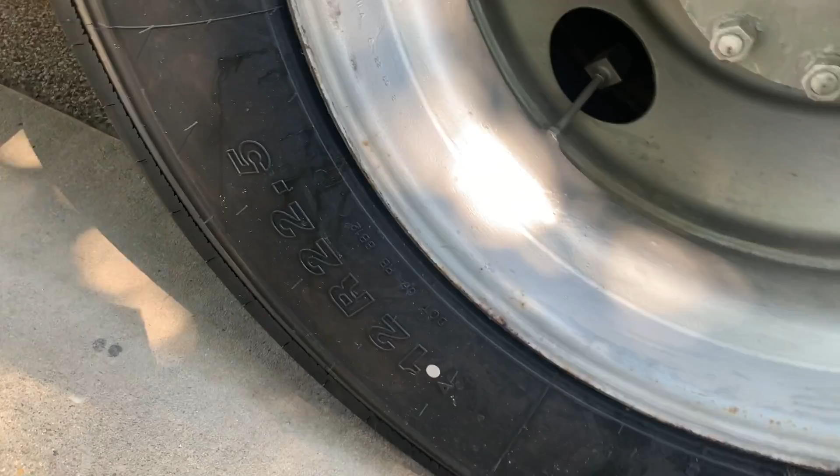A couple people asked about tire pressures. I made mention that that's why we went and got the bus weighed, so I know what my rear axle is. I've got 16,780 pounds on the rear, and I can divide that by 4 tires.

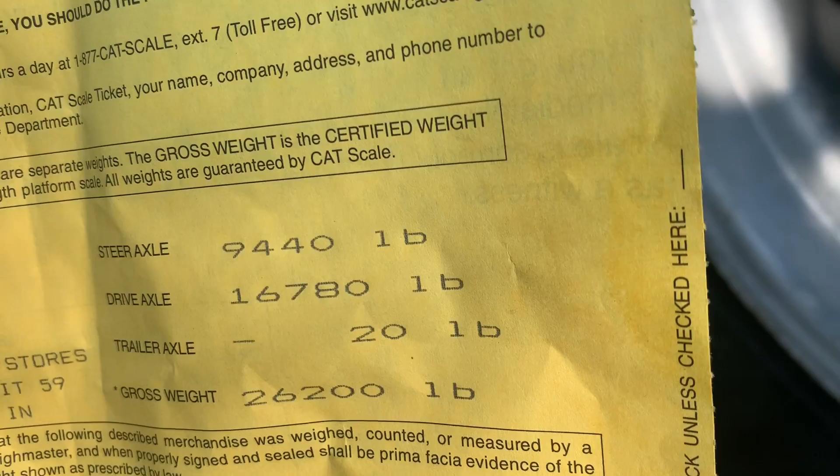Then I contacted the tire manufacturer, and they'll have a chart. Most of them, the chart's online. I couldn't find it for this brand, so I had to call them, and they gave me the information over the phone. Basically, they rate the tires at different weights, and for duals or for singles it's different, and the amount of tire pressure you should have for the amount of weight it carries.

Their chart, the smallest it goes down to is 4,700 pounds, and at 4,700 pounds per tire, so I'm under that. I'm only like 4,000, just barely 4,000. So I'm in no concern of going over that. I'm not going to add that much weight to the rear.

Just to give you an idea, that recommended tire pressure is 80 psi. The tire itself, the recommended psi is 135, what's stamped on the side. That's the max load on them, which is 7,160 pounds per tire for a dual, so that'd be 28,000 pounds - more than my entire bus weighs just on the rear axle. So I'm well under that. 80 psi is the recommended tire pressure for that. That's a good number to use.

Why do you use that? You'll get better fuel economy, a little better ride. I don't need to be driving on rock hard tires like that if they're not carrying the weight. But you can't just guess at what that is, you need to go by their chart. They've tested it, they know what it can handle, the sidewalls and all that.

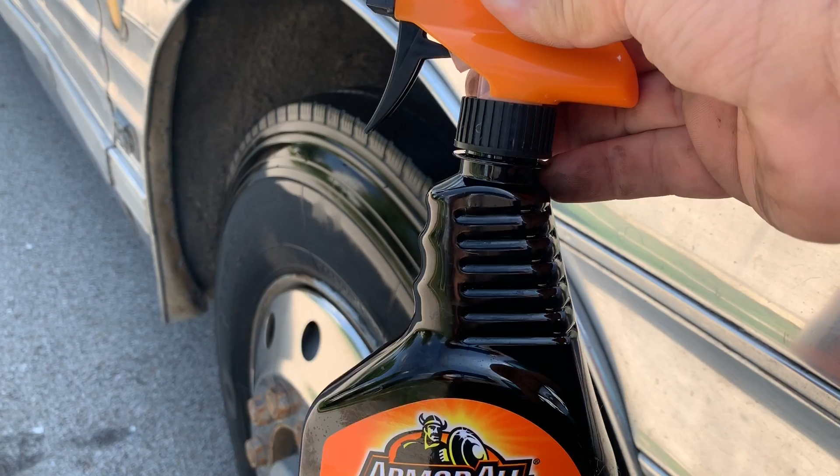That's the tire shine I used. I'll throw an Amazon link to it. The tire is as shiny as the bottle is - I put it on about 4 hours ago, just walked out here and that's what it looked like. I'm surprised.

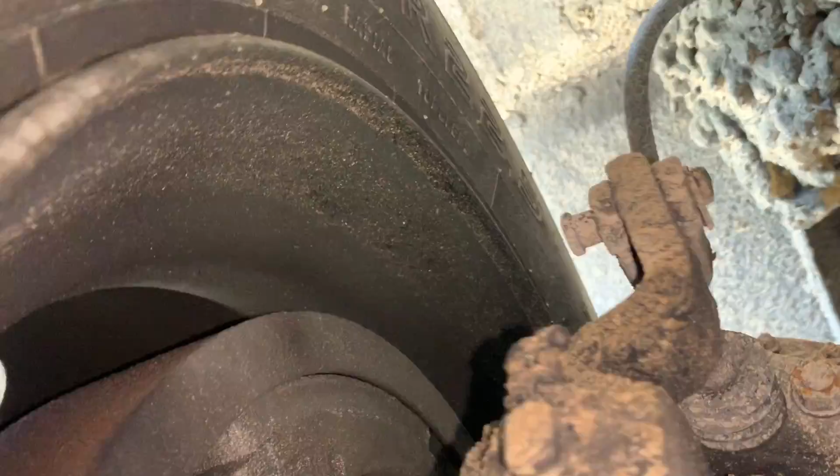So a silver side slack adjuster is a little different. Most slack adjusters have a little collar you have to push down on. The silver sides is just that you use a wrench and not a ratchet. You can see I got plenty of meat on the brake shoes there.

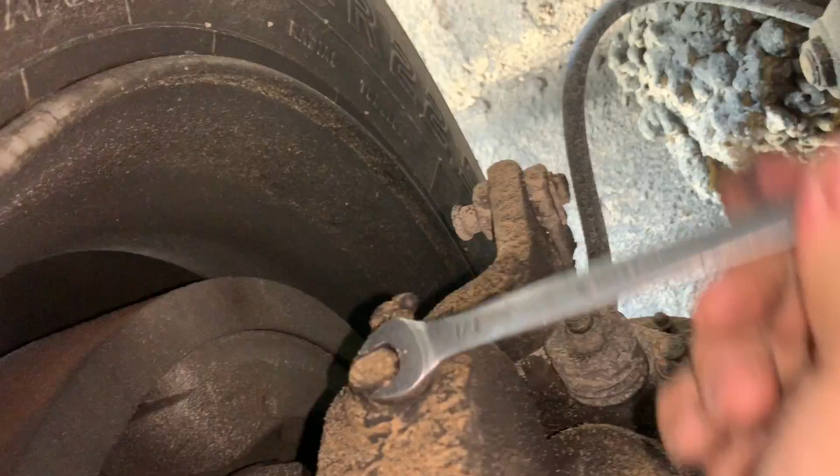So you turn it as far as it'll go tight. I got about a half a turn on it, and then if you just back it off a quarter turn, it's adjusted.

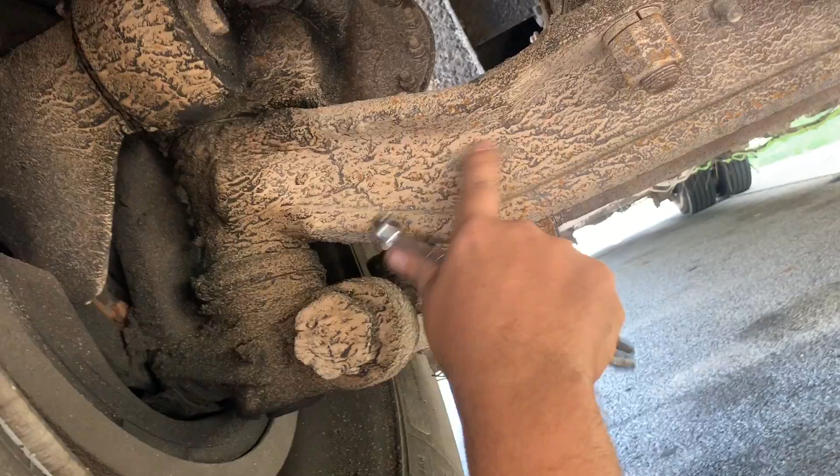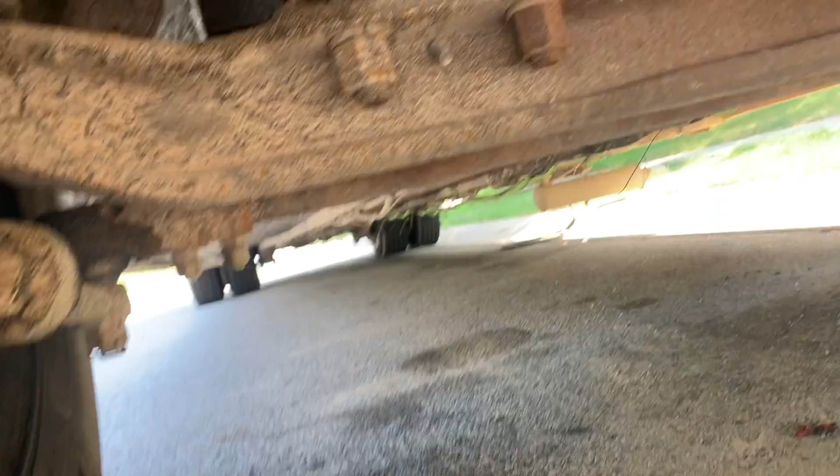I'm going to get under here with my hose in a minute, and this is all that sandy stuff from Michigan still on here. I'm going to try and clean this up just to get that crap off there, because it's definitely salty - you see that rusty color coming through. And then I'll grease everything up. I'll show you the grease chart on this. If you don't have a bus, you'll be like, oh my God, that's crazy. There is a lot of grease fittings on this bus.

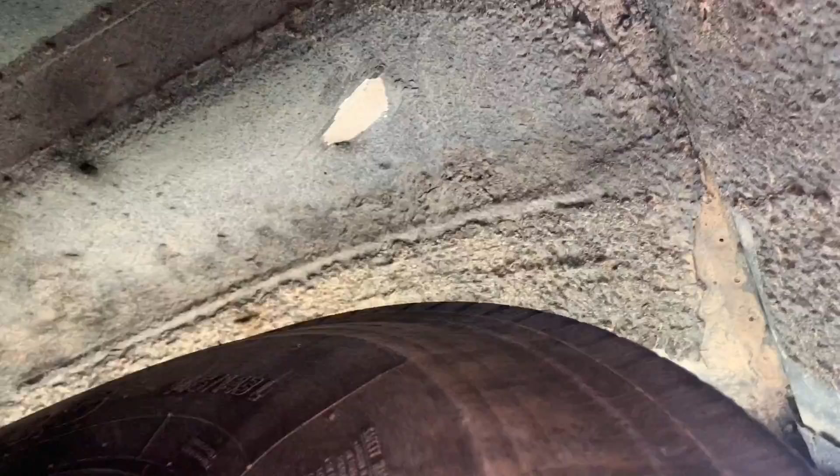Oh, that's all right tight. I'm gonna go one more click because 2 clicks wasn't quite a quarter.

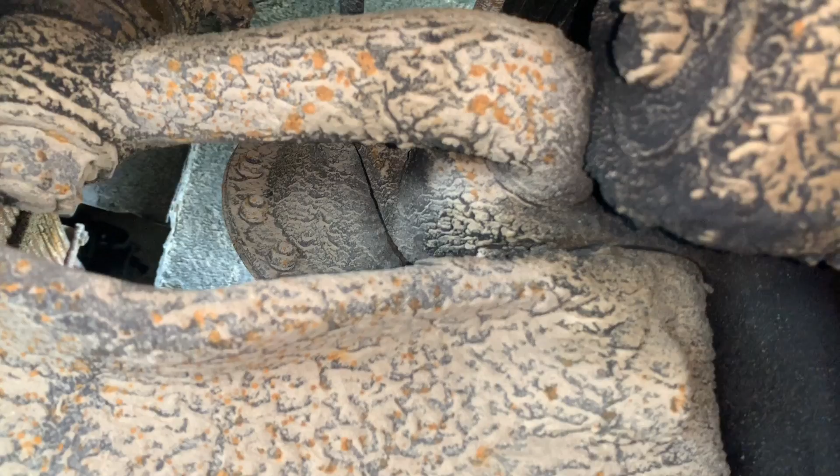Plenty of meat on the shoe. Same thing, I'm gonna get all that sand, try and get that all off there. I don't want that getting into the grease or anything, and then the new grease should clean it out a little bit.

This is my air horn, and it's probably 2 feet long. It's huge.

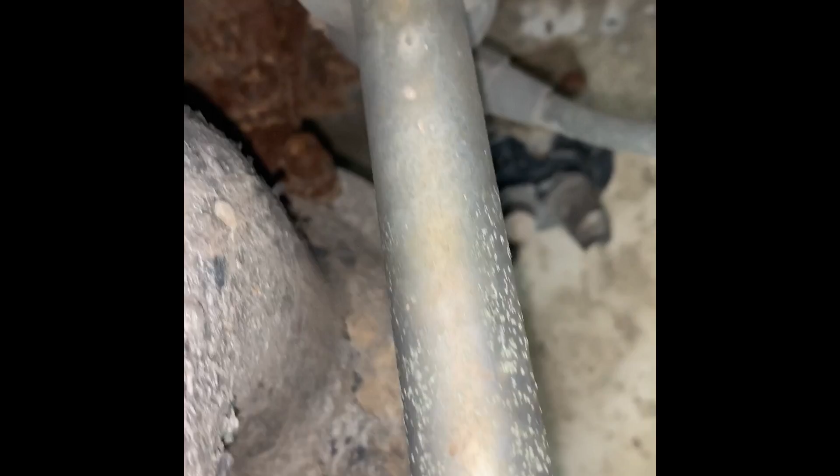One of the things for the pre-trip for me is checking for leaks, and I see a little puddle under the engine there where it looks wet, and it looks like the drain plug's wet on the bottom, so go check that out real good.

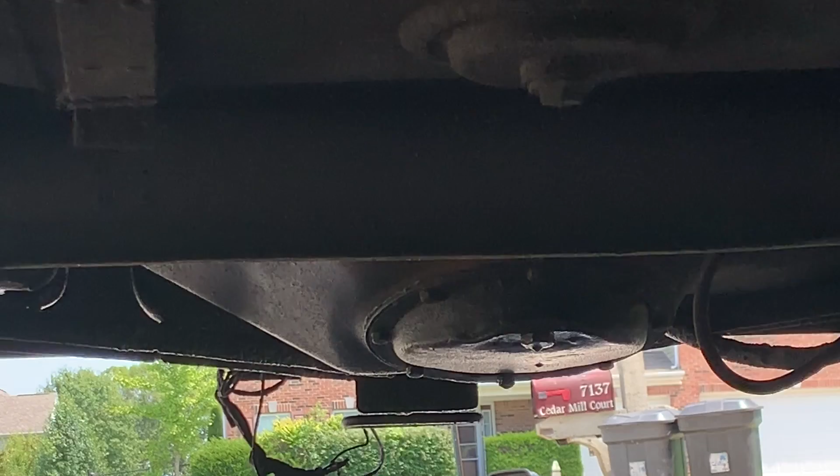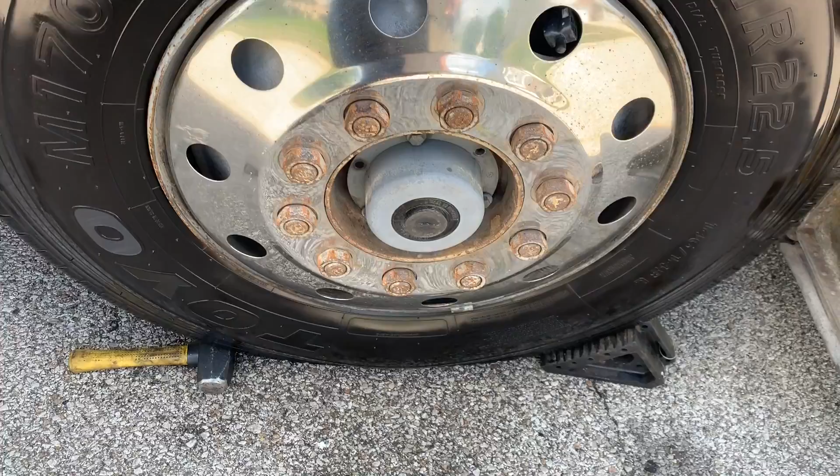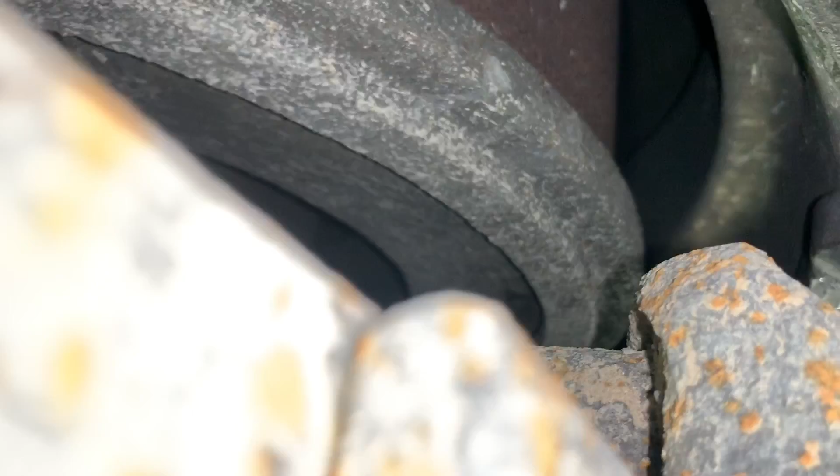Got the wheel chocked because I had to release the parking brake in the back in order to do the rears, since you can't have the brake engaged to set the brake chambers. So there's the slack adjuster, and there's the brake shoes - more than half an inch, maybe not quite 3/4 of an inch of shoe left on there.

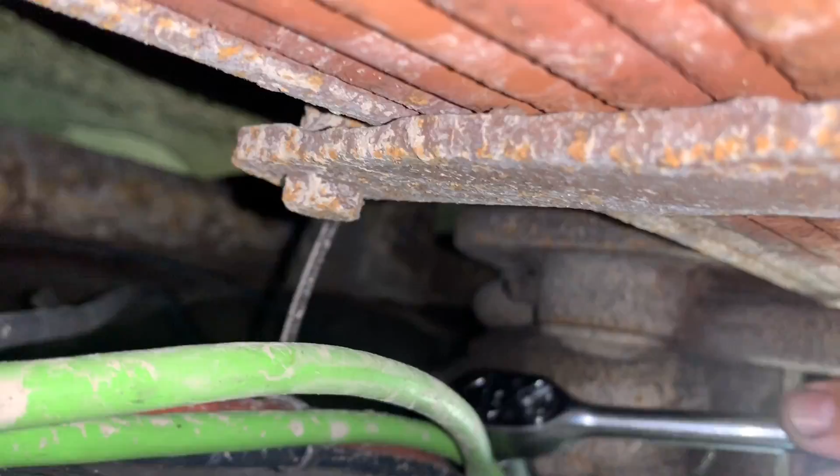This is hard to get to. I may not get a video of this one.

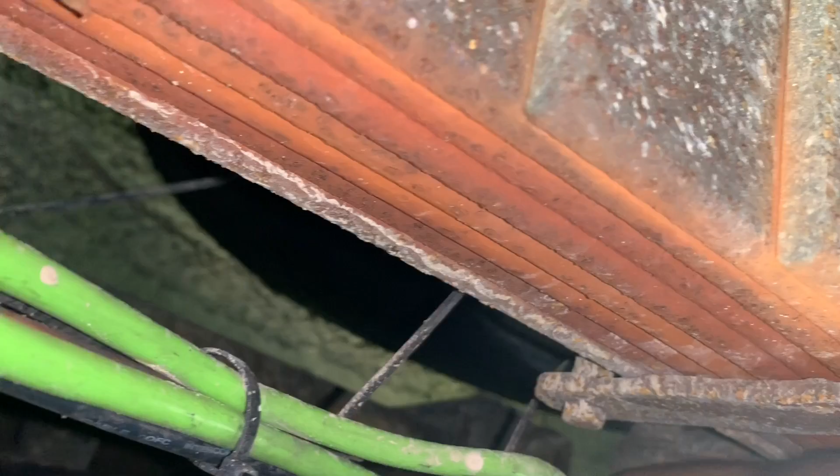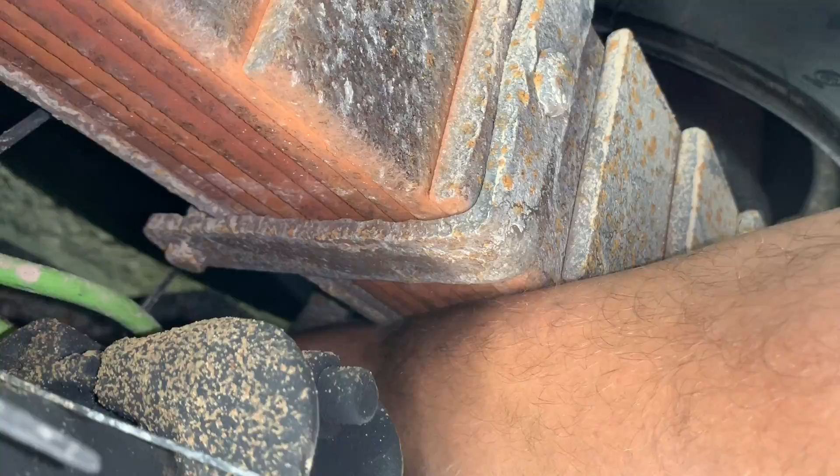Gotta set the phone down. So the oil pan's real dry all around it everywhere, just a little shiny right there. But I think that's leaking there, and or the drain plug over there and it's blowing back - that's probably my guess. So I got my 15/16 here. But it definitely put a little spot there, a little bigger than a Coke can.

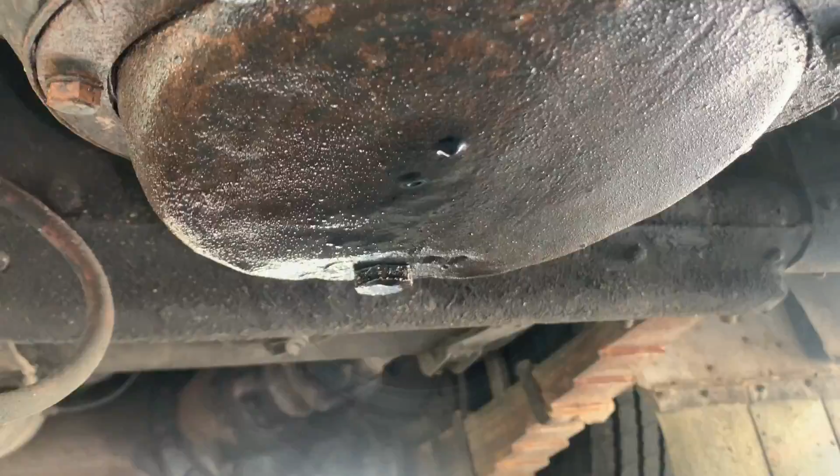My bus actually is not running right now, it's turned off, and I got about 62 pounds of air in there. I always want to check my brakes, so when I step on the pedal, I'll lose air pressure as it fills the brake chambers, but then it should instantly stop losing air and hold that air without losing any.

So I'll step on the brake pedal and hold it down. And you can't lose more than - I don't remember what DOT is, I want to say 2 psi a minute. You can see I'm not losing any air at all.

That's just a safety check to make sure that the diaphragm's not leaking or a brake hose or something like that.

Overall, I don't lose any air on this bus. I started this bus up earlier, put 80 psi in it, and that was just enough to release the parking brake and then reset the parking brake. That was probably 3 hours ago, and it's still holding that same air pressure. So this does real well with that.

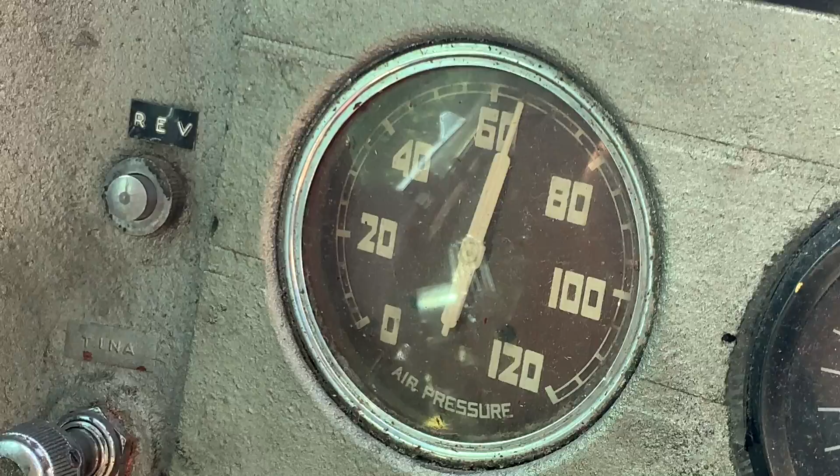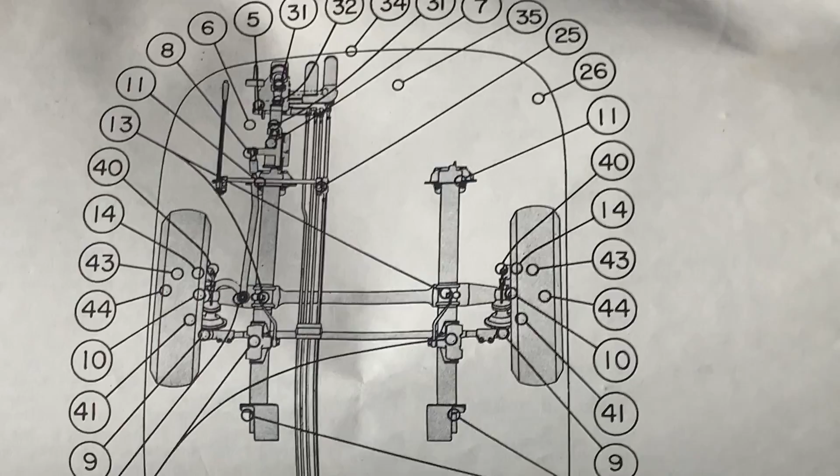Okay, here is my lubrication chart. Most of these are grease fittings - I told you there's a lot of them. Every one of those numbers.

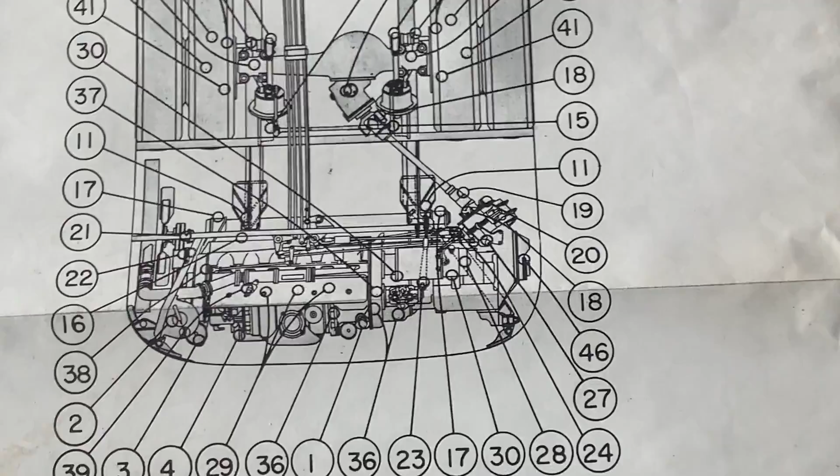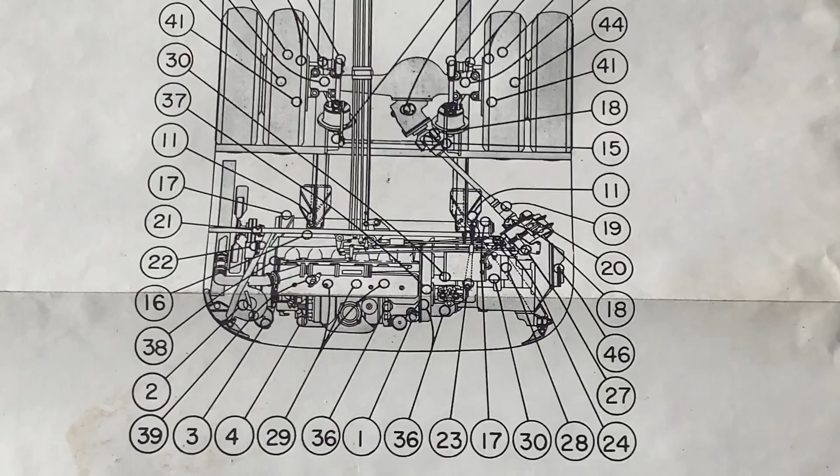A couple things aren't, like battery terminals there are not. Differential, that's oil. Transmission, engine oil, engine filter, that kind of stuff are on there. Engine strainer, which I don't have anymore - I just have a spin-on oil filter, which is better. But if you had a sock filter on there, those always have the strainer can, which is a separate one. So all this stuff is clearly listed here on a chart.

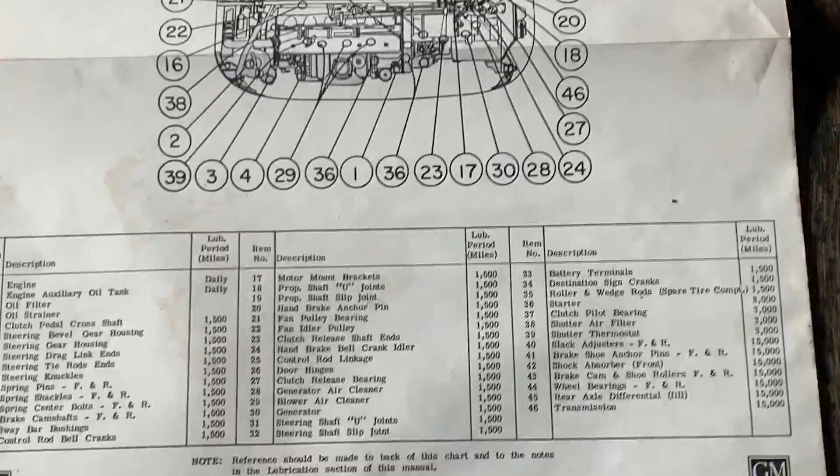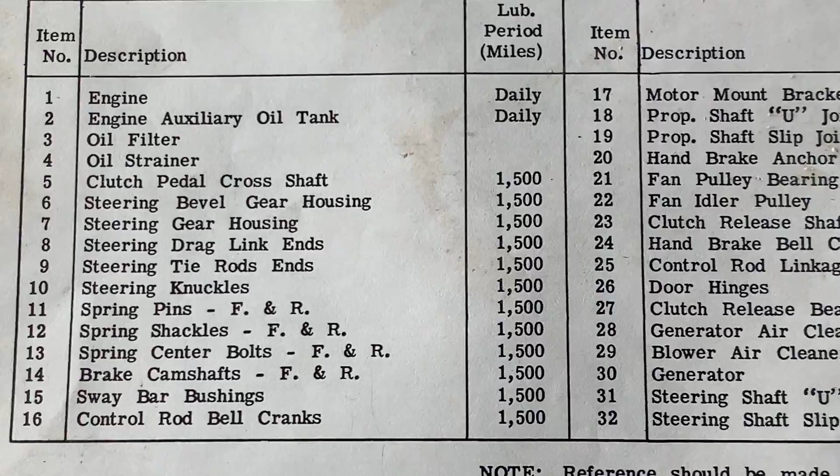But again, if you look at all those, every single one of those numbers, 90% of them are grease fittings. So there's things on there like the bell cranks that go for the linkages and the steering, the clutch and the throttle and everything like that. And then the lubrication period - this will really freak people out - it's 1,500 miles for most of that stuff. And then the numbers correspond with the code on there.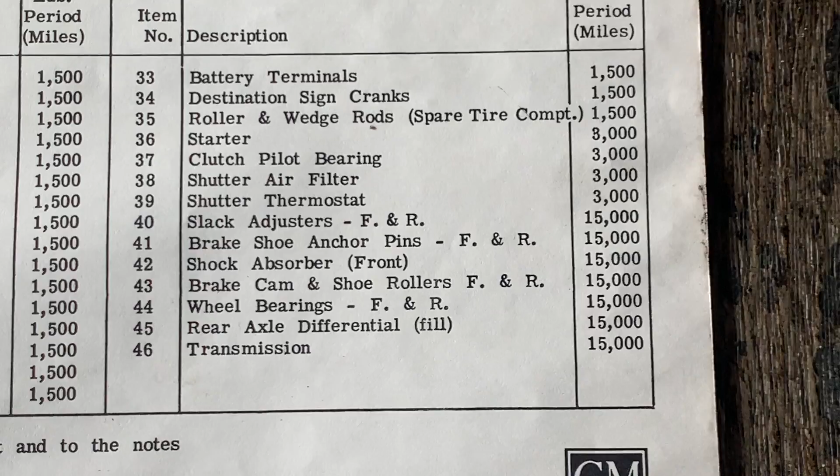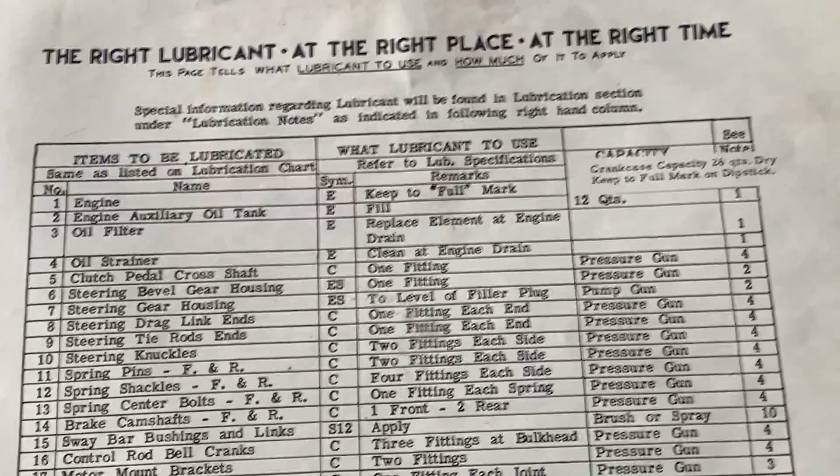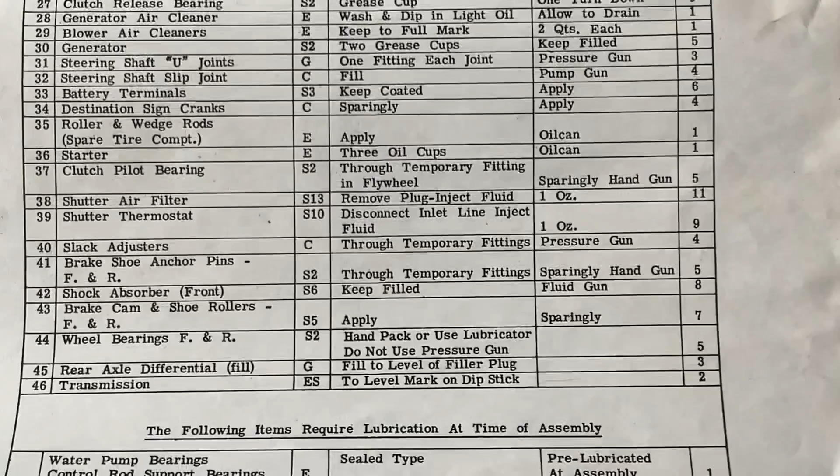So the back of this tells you what to use. For the most part, everything here I'm just using a multi-purpose grease for. But all of these codes stand for a different oil. It could be like sodium soap grease, chassis lubricant, gear oil, that kind of stuff. Here's the chart.

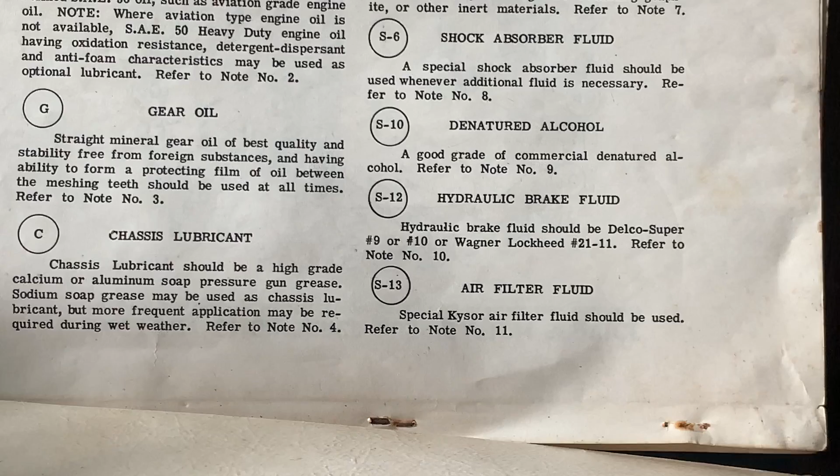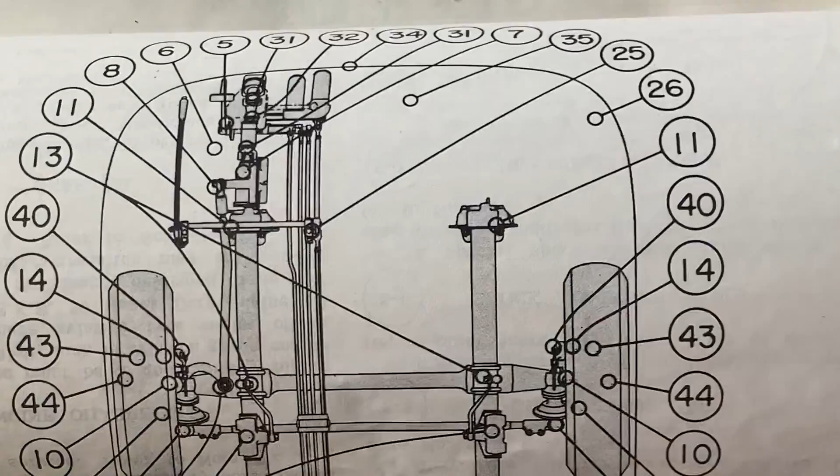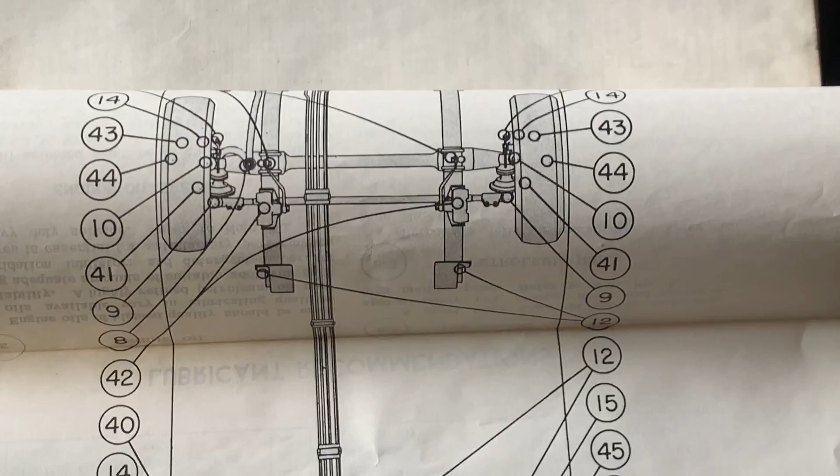So there's a lot of stuff to do on maintenance on a bus. I would assume this chart comes as a surprise for some of you guys. If you don't own a bus, you'd have never realized there's so many grease fittings on here. Some of them are for the steps up front, and all the normal tie rods, kingpins, slack adjusters. The leaf springs get greased everywhere, and they actually get greased where they cross the axle too. There's a fitting on there too, and then up at the shackles.

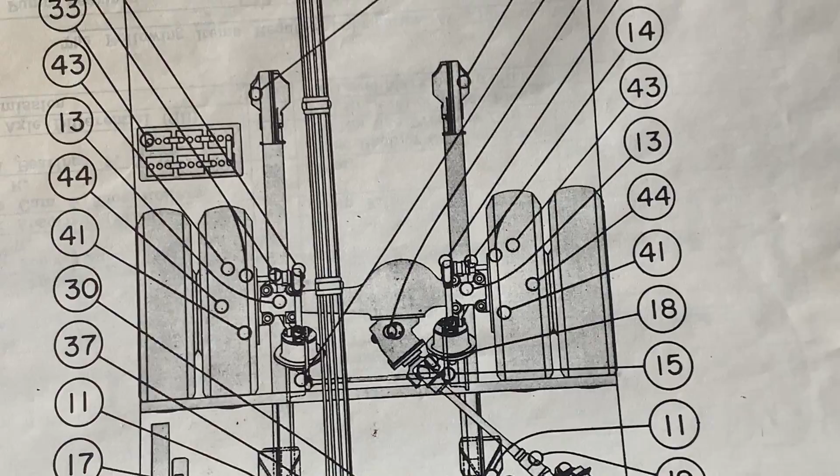It's a whole lot of work to do, and it usually takes me about an hour and a half or so to go through the whole list on them.

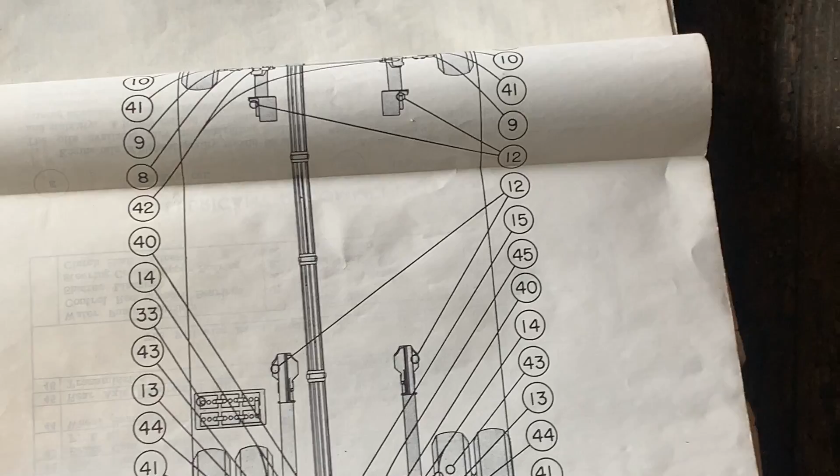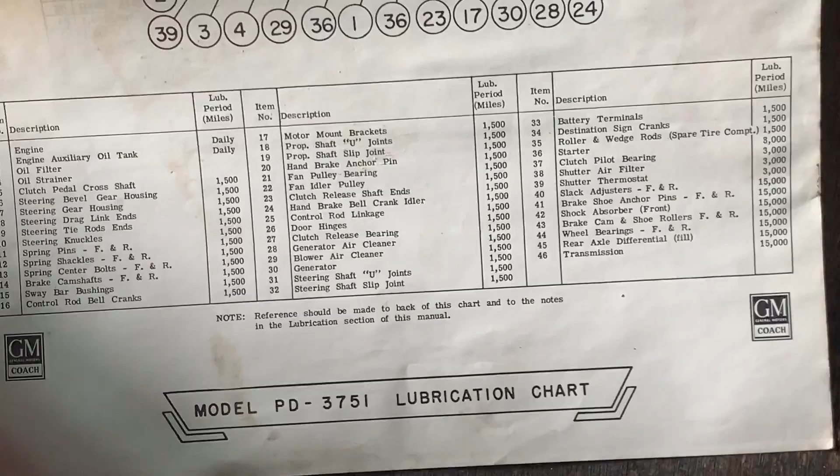The good thing about the Silversides is you can climb right under it. You don't have to block it up or pull it up on blocks or anything. Even big guys like me fit under, especially now with those higher tires in the back. I climbed right under there today into the slack adjusters with no help whatsoever. I do have to be careful on the one side because I have the airbags, so it's up about 3 inches over there. As long as I got 3 inches of clearance, I'm fine. I have a wood block that I throw under there.

So I'm not gonna take you through every one of these while I get down there because I just need to have 2 hands on the grease gun. It's not something you want to watch somebody grease tie rod ends and stuff like that - you've seen that and know how to do that. But just showing you the chart and what's involved in it and what the intervals are, that helps people know what to do.

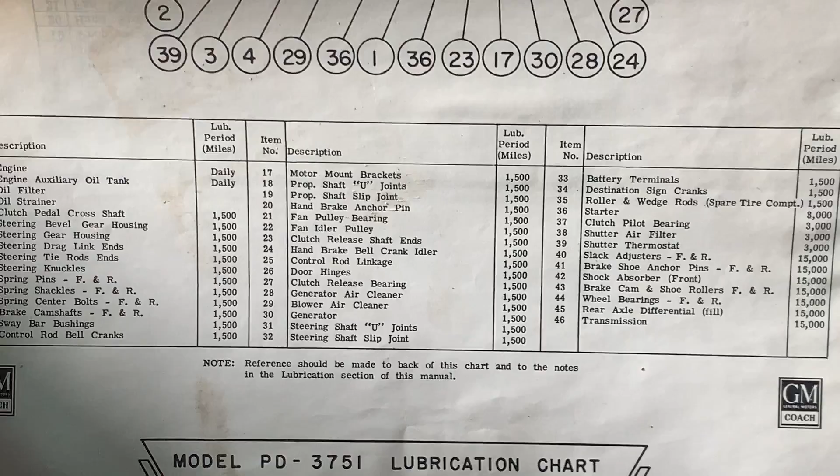One of your best traveling companions is right there, a Vitamix. If you don't have one of those, they're pretty awesome. My wife makes all kinds of amazing food in those - soups and everything, it's great.

I finished the install of the remote for the Magnum inverter. This is the little wall between the bathroom and the kitchen, and this is where we have a little USB dual charge port that's wired in off a 12 volt, so it's off the house battery system, so we can plug in our phones and stuff like that if we need to. That's our water pump switch, smoke detector, and so on. But cut the hole in the wall, that's great. Now I can reach all the functions for that right on there.

Part of my pre-trip is just checking out the wheels, checking the fluid level in the hubs, my tire pressure - I just make sure it doesn't look like they're bulging or anything like that. And then I have a TPMS system that tells me the exact, so I don't have to check them like that. And that tire shine, I still can't believe that. So I got all the bottom of the bus washed off. Everything's pretty much so ready to go.

So tomorrow I'll do the complete pre-trip before I go, including the air brake test, where I check the air compressor cut in, cut out, all that stuff. There's no reason to do that today - it was working the last time I did it, and that's part of my regular pre-trip for the real trip. Today was just mostly maintenance on things, getting them, going over them for the pre-trip, looking at everything, and then servicing stuff on there too. So everything should be good to go.